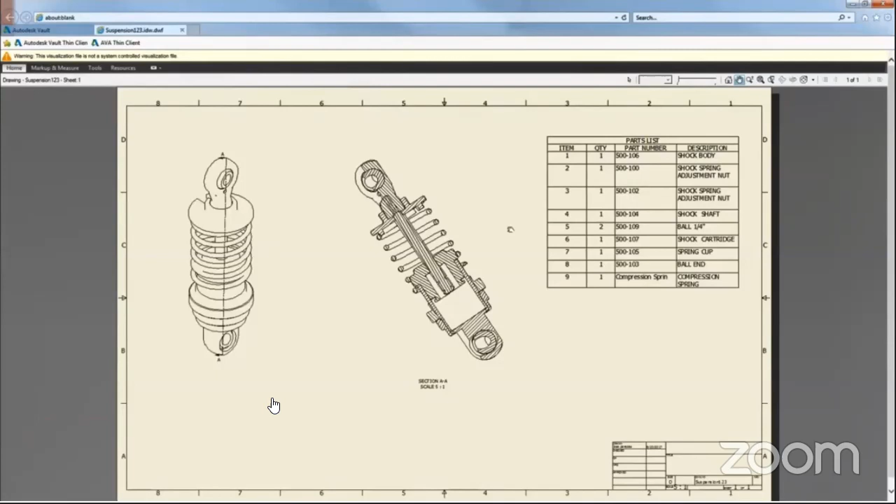And it's got a full 3D viewer in here. People ask me all the time, I need a free viewer for drawing files, or I need a free viewer for assembly files. And why? I always ask why. In general it's like I got an email from a customer, or from people in my engineering department, and they need to show me what they're working on, or I need to give this to my marketing team so they can see what I've built, things along those lines. This is a solution to all of that. Usually it's like, yeah, there are free viewers you can download along with the files, but why do that when you could just use it from the context of Internet Explorer and be able to look at the actual drawing file or the assembly file yourself?

Within the assembly or part environment, you have full access to flip and manipulate the actual file itself. If you're using items within Vault Pro, you've got a full item master in here. You can go ahead and take a look at information about the items themselves as well. So it's not lacking in any particular area. I'm going to go ahead and open this particular assembly. As you can see, this assembly is fairly complex. There's a lot of components in it.

Well, what's important to every assembly, that's important to people downstream, people in the purchasing department that you want to connect to? I think that answer is pretty simple for all of us: it's the bill of materials. That's always a frequent hot topic when I'm talking to customers about the flow of data in their organization—how do I get this to another system, whether that's purchasing, CRM, ERP, whatever that may be. A lot of times I hear people say, hey, we export Excel spreadsheets and we import them, or we hand type them. And that's like the worst one. I really dislike hearing that—we just hand type it over again.

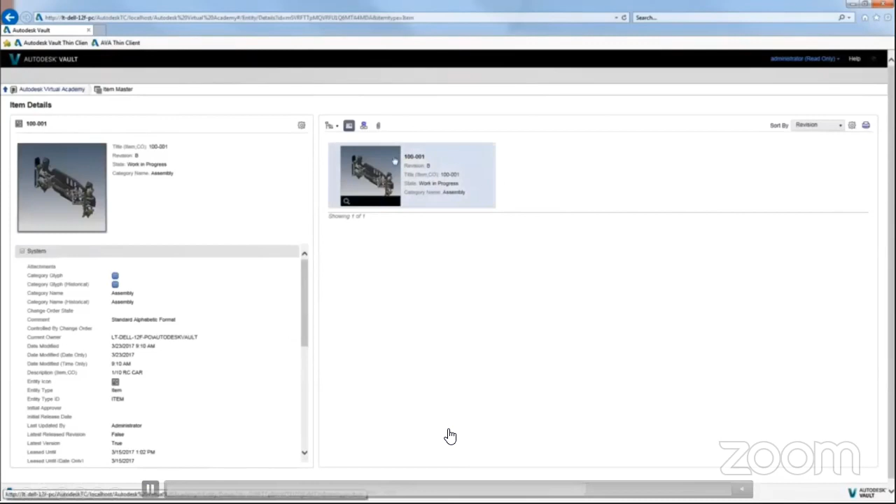Not as fun. But if you want to be able to just see what's in there, you can go ahead and click through any of this and pull up a full bill of materials, a multi-level BOM of the assembly itself with a lot of pertinent information. This is all customizable—bill of materials reports, really awesome. You could customize the report so it's got your logo on it. You can do a lot of awesome stuff within the Vault Thin client, just to give a level of access to people who need it without editing privileges.

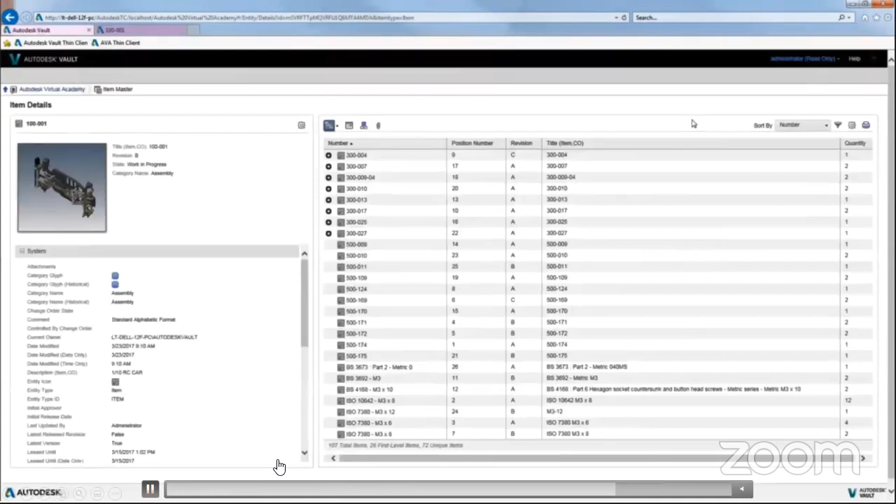And what's great, as we mentioned before, is having one single source of truth, and that's just a perfect example of it. Instead of creating Excel spreadsheets or anything that would be like a second life to your products or projects, everything is included in one single source of truth and available to pretty much anyone you give access to. So that's amazing.

Absolutely. And that source of truth is always updating, as opposed to these multiple manual entries. I hear that a lot—oh, our purchasing department ordered 10,000 of the wrong component because they forgot to update their purchasing information based on our bill of materials. It's like, wait, why would you do that? I have a customer who may or may not have done that and has 10,000 of the wrong part sitting in the corner of their facility waiting to be used on something else. Not fun. So formalizing it in this kind of way is something I think is really important, and just getting the right people the right access to the information at the right time. That's ultimately what we want.

And I think that's really key, right? Broken links - we hear about it all the time. It is my least favorite thing. We've all seen the error message before, and we want to alleviate ourselves from that.

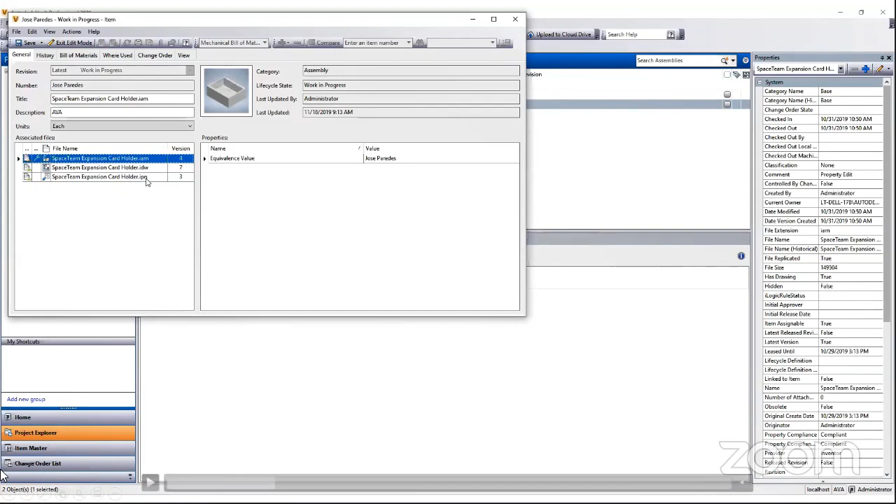So within this item, you've got information like bill of materials. You can see all of that stuff. But more importantly, we're going to go ahead and show off some of the functionality to be able to attach some pertinent information to this assembly. And so this is just for the sake of doing a very simple demonstration.

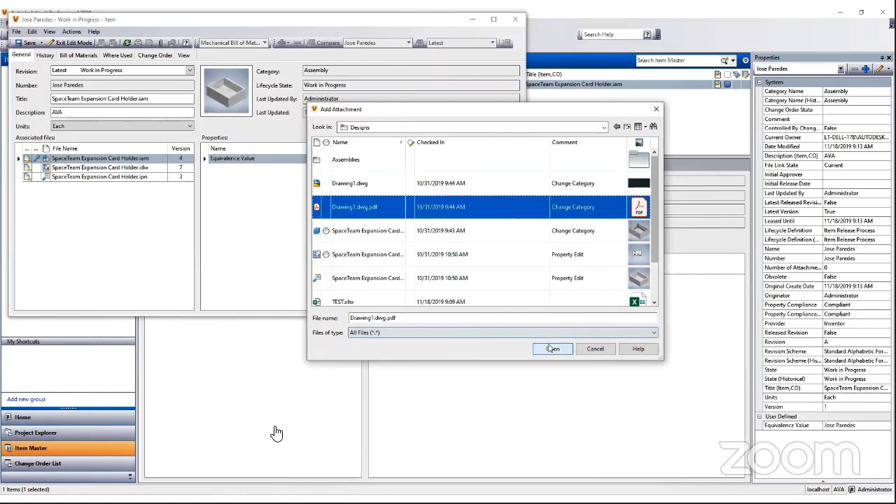So I'm going to go ahead and add a couple of attachments here. Bring this window over. And then I can go ahead and add attachments to those files. And those attachments don't have to be CAD files. They could be PDF files like I've added here. They could also be Excel spreadsheets, which I'll go through and add again, right? You can have unlimited attachments.

And we understand that CAD data is not the only thing that drives an assembly. There's other things as well. Maybe you have an Excel spreadsheet driving some of the dimensions of your components.

Perhaps if you're using something advanced in iLogic or something, you can have that Excel spreadsheet attached to the data as well and manage that whole thing, as opposed to all of these disparate files being disconnected from one another.

Hopefully that answers some of those questions that came through. Mark, do you have anything to add here in terms of being able to manage non-CAD native data?

Yeah, it's so important for people outside of the CAD world. There's a lot of managers, product managers, program managers, project managers that need to get involved, salespeople, purchasing. So having people connected to the single source of truth, even if they have no clue how to run a CAD system or even how to spell CAD, they can still use the Vault to store their files and make sure that everyone is using the latest and the greatest.

Absolutely. And the references are correct and all of that stuff. Because the last thing you want to do is print out a drawing, bring it to the shop floor, and then have that drawing on the shop floor while you're revising it, right? Maybe they accidentally build the wrong assembly based on a model change you're making right now. You guys shouldn't be seeing this.

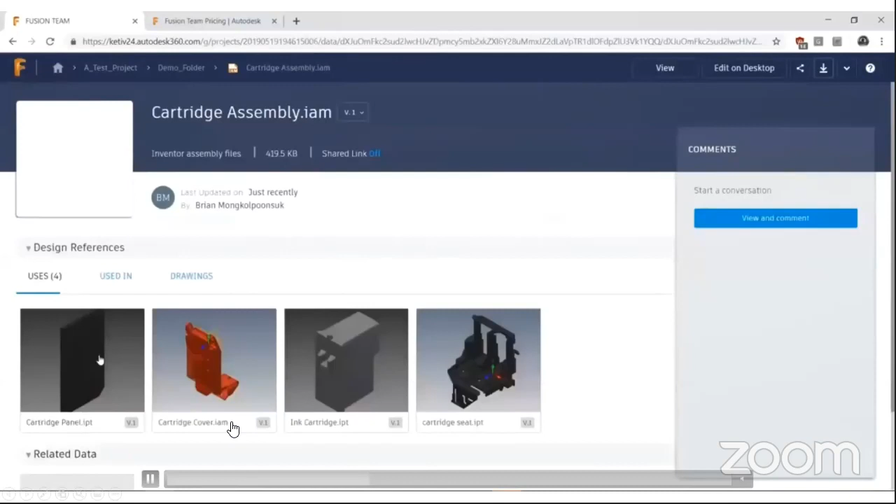As I'm bringing those files over, I've got a group of files. What's important to the person on the other side? If they want to review the file, open it up, take some measurements, or look at an exploded view, those are things you can do within here. Maybe they need to download the file, they can do that too. These cloud syncs can be bi-directional, so if they make a change and upload it back in here, it can go back into your vault.

Really interesting. So I'm just going to go ahead and show some of the explode model functionality within here. It's really awesome to be able to see what's going on the inside of a particular model. I'm going to pause here as well.

So let's go ahead and take a look at this model. It is super complex, I know. Took me a really long time to put this guy together. Something I would do, absolutely.

Say, for example, I'm working on this and I had sent this rectangular prism. Let's just ignore this cylinder here. I sent this rectangular prism to Mark, and Mark's like, awesome, that might work for the assembly, but I think it'll be better if we add this cylinder for some reason. And I'm like, cool, awesome.

Well, Mark's not in my network. As we know, Mark is in good old Canada, I'm in California, probably not on the same network. So what does that mean? That means Mark doesn't have access to my vault without VPNing or something into the system. And I'm going to send him this through Fusion Team.

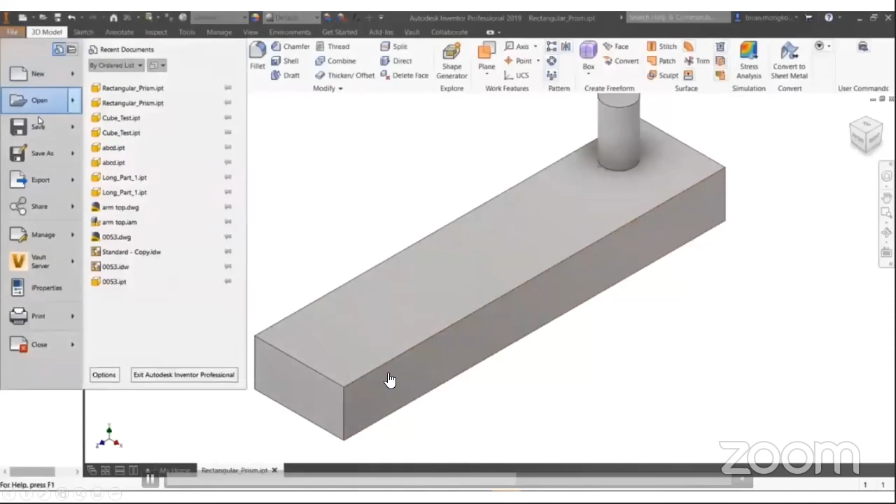Mark's going to take that file down, start editing it. He's going to make it look a lot prettier than I did because I don't have a refined design mind, for sure. He's going to add this, and what's he going to do? He's going to save this down into a drive that syncs directly to Fusion Team, saving this rectangular prism down into this folder.

And then as you can see here, let me go back about a half a second there. This is the file that I uploaded, just this rectangular prism file. And this is the file that I sent over. Well, someone made some changes to that file and uploaded it to the drive. If I refresh this, you get another version like you do in Vault. It shows you, hey, there's another version in here. It's still loading the visualization for that.

And I've got that file. Well, awesome, this file's in the cloud. This is not in my Vault. What if I need to use it in my assembly? If you create a bidirectional flow back into Vault, we'll jump back into Vault here.

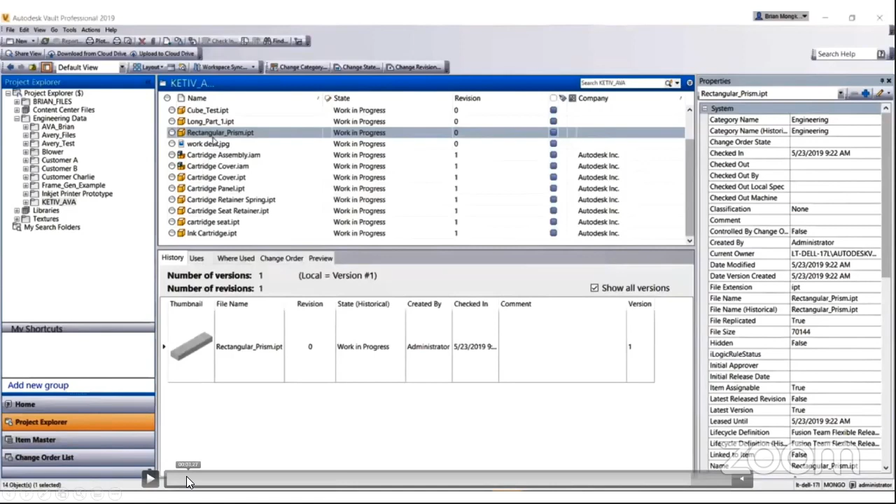You see you have one version, and please excuse the smoke and mirrors for editing's sake. This would have taken a really long time to actually do the demo.

I'm going to go ahead and refresh this again, and I've got this from the cloud drive. As you see here in the comments, it's downloaded from the cloud drive. I've got version 2, I've got the rectangular prism, and I've got that awesome cylinder in here.

So if you need to work with somebody outside of your network, you're not restricted to using things like email. This is intelligent. If this was an assembly, it would understand that it's linked to a bunch of other components. And this part file, if it's being consumed by a bunch of assemblies, when you open those, it would update to this awesome one with the cylinder in it, things along those lines. Really important, and things you don't necessarily get with something like Dropbox or email in general.

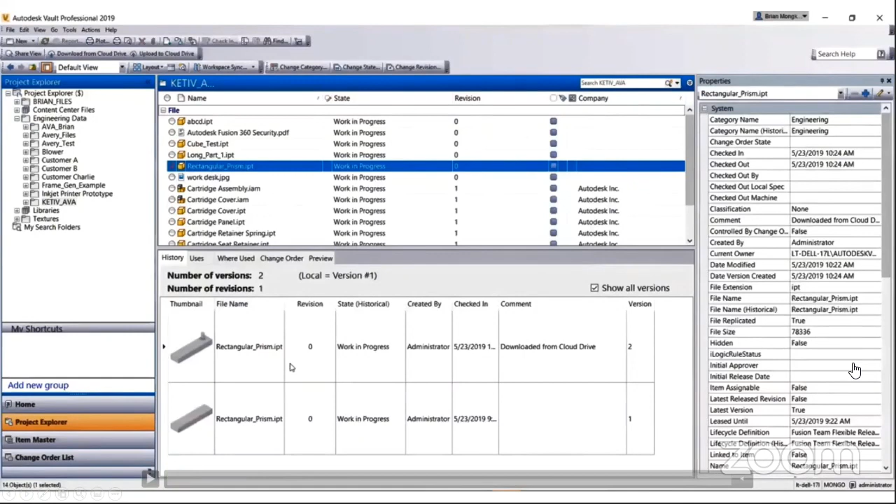Anything there you want to add before we move on, Mark? No, you nailed it, this is so important. Absolutely, and it's so simple to set up. Fusion Team, sync to Vault. It's awesome, I use it to communicate with customers. Sometimes people send us files through Fusion Team for us to diagnose things along those lines.

They've had Vault for a considerable amount of time, but we've made a lot of changes, customization, and automation to help them. I'll recite this quote from Holly over at CAP: we now have the ability to manage and work on concurrent designs, as-built, and record drawing life cycles while maintaining a high quality and integrity level on each document. With our ingenuity, it has allowed the ability to resource workloads at a greater level and detail than industry standard approaches.

Really awesome, they've started to leverage a lot of automation and customization of their data management system. They've been managing their data for a long time, but being able to leverage some of these more advanced tools within data management, instead of using Vault as a simple repository for data, has gotten them really far. That's something we want to share with people, so you're leveraging the most out of your applications.

You have Vault, maybe you have it installed, maybe you have Vault Pro installed, and you're not using all of the functionality. Maybe you don't need it, that's sometimes what I hear. We're managing the files okay, we understand how that works, but we don't maybe need the release system or things along those lines.